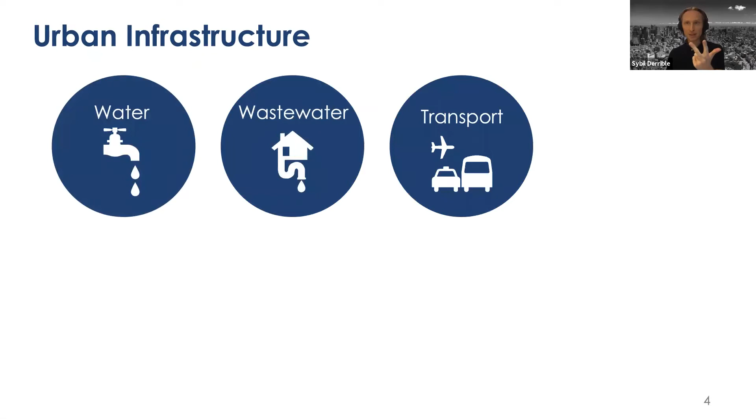To be a bit more precise, we're going to look at several infrastructure systems: water, wastewater, transport, electricity, gas, solid waste, and telecom. And then we'll talk a little bit about the future. We'll have quite a big agenda, going over 7 infrastructure systems. I'll try to be quick, but not that quick, and I'll try to at least show you things that are relevant to what you're doing. And we'll go in that order.

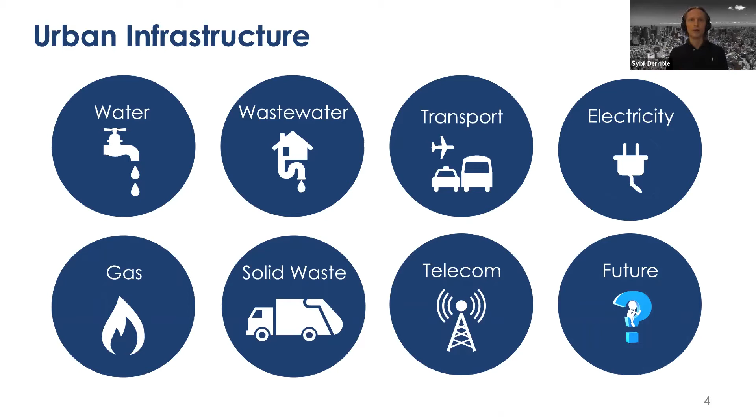So we'll start with water right now. When we're thinking about water, and when I say water, I don't mean wastewater, I don't mean storm water. I mean really just when you open your tap, how does water get there? There's 3 things that you'll have to do.

The first thing is we have to collect water from somewhere, then we have to treat it, and then we have to distribute it. I'm going to go over these three one by one.

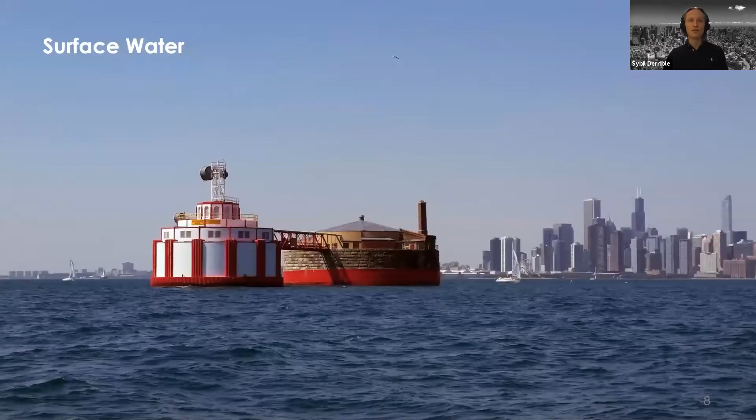Water collection: if you're lucky, like we are here in Chicago, you have tons of surface water right where we live. Here we're very lucky because we're on the shores of Lake Michigan. Sometimes you have access to a big river, or just tons and tons of water.

The way it's done in Chicago is actually pretty neat. You have cribs, like the one in the picture, about 2 miles out into the lake, a bit offshore to make sure we don't collect water near the shores that's polluted. Tunnels are dug beneath the lake bed, and a big tunnel goes from the crib all the way to the Jardine treatment plant near the pier. That's where the water comes from, is uplifted, and then we'll talk about treatment after.

So that's when you're lucky, when you have a lot of surface water. Otherwise, it's actually way more groundwater than surface water. Using pumps to pump water up from the ground and then treat it is also very common. About 30% of all the freshwater reserves in the world are in the ground, and close to 70% are in the ice caps. So many cities actually pump water from the ground. I'm not going to go over how that works—we have two types of aquifers—but that's just one of the sources of water.

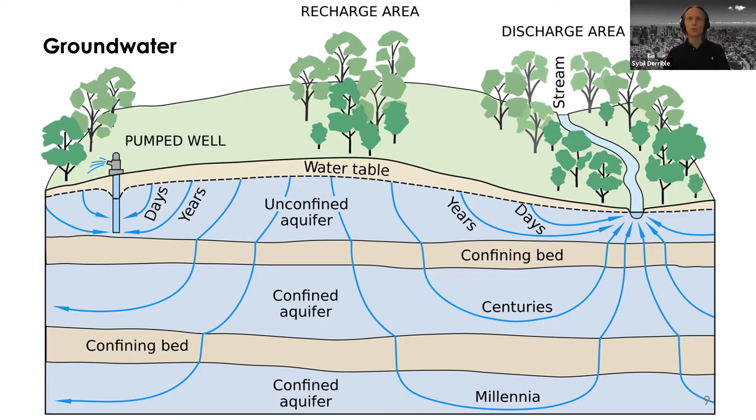And the last one, which is becoming more and more common, is the sea. Cities are getting bigger, but sources of water are not getting bigger, so sometimes we have to be creative. For the longest time it was very difficult to get water from the sea and purify it, but now we're becoming better and better at it.

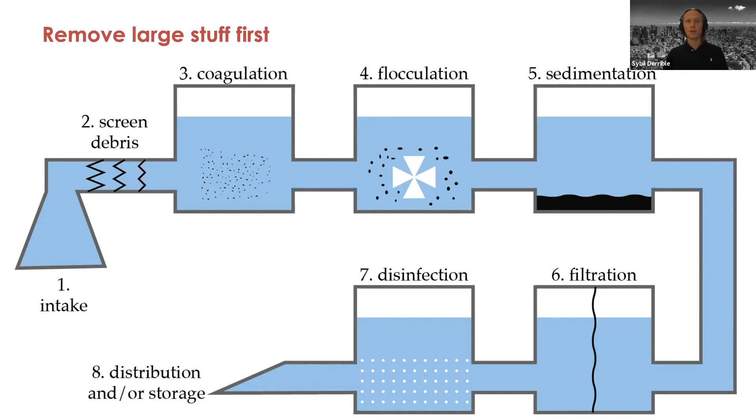After water is treated, it's time to distribute it, and that's where you have those pumps.

I'm going to show you a water tower because it's actually still working in Chicago. In some places, when they have a lot of hills, they have the water treatment plant up the hill, and this way gravity just pushes all the water through the system.

Where I'm from, in St. Pierre and Miquelon, that's what we have. We have a few lakes at a fairly high level. We get water to a water treatment plant, and all the houses are below the water treatment plant, so gravity just does its thing.

Chicago is flat as can be, right? You cannot get more flat than Chicago, so we need pumps. We have a few pumps, not that many - about 12 pumps in Chicago - and they keep pressure in the system, in the water pipes, at all times to make sure that when you open your tap, water is flowing out.

Every time I have visitors coming to Chicago, we all of course have to go to Michigan Avenue. And of course, I have to bring them there, and I open it and show them how great the pumps are, and nobody cares except for me.

Someone told me once that engineering was a lifestyle, not a profession. I believe that - I really get intrigued and interested in things that many people don't have any interest in. I still push them to look at the pumps because I think they're really cool. Just go and you'll see them - they're massive, it's incredible. And it's thanks to those pumps that you have water whenever you open your tap.

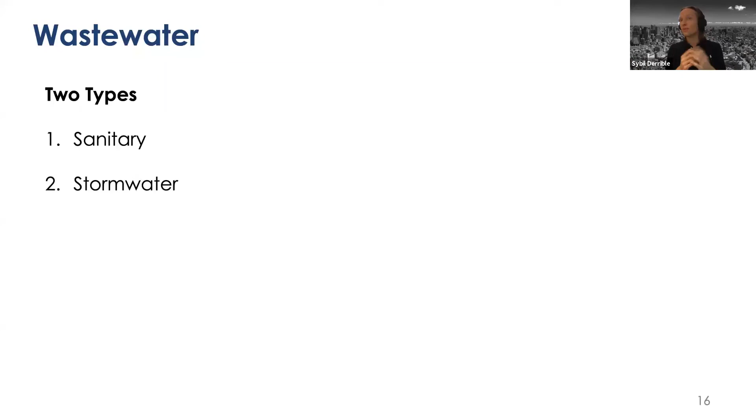And that's what most old cities did. When you have that, you have what's called a combined sewer system. It's combined because it's combined sanitary and combined stormwater system.

Here's a typical case in Chicago where you have a house, and people use water. Then it goes at the bottom of the house, because we use gravity, and then you have a pipe that goes to the sewers. At the same time here are the streets.

The streets, they're never flat. They look flat sometimes, but they're not. They're always arced a little bit so that water goes naturally to the gutters. And then from the gutters, they go to catch basins, and then from catch basins, they go to the sewers.

So you see that when it rains a lot, not only do we have all the sanitary sewer that comes all the time, we also have the storm water that comes there as well. And that's actually a big problem.

That leads to something called combined sewer overflow. We actually suffer from that very often in Chicago, where the sewer system is completely full. And so what happens is that a lot of that raw sewage is just being put in the Chicago River, completely raw, untreated, which is a very, very large problem.

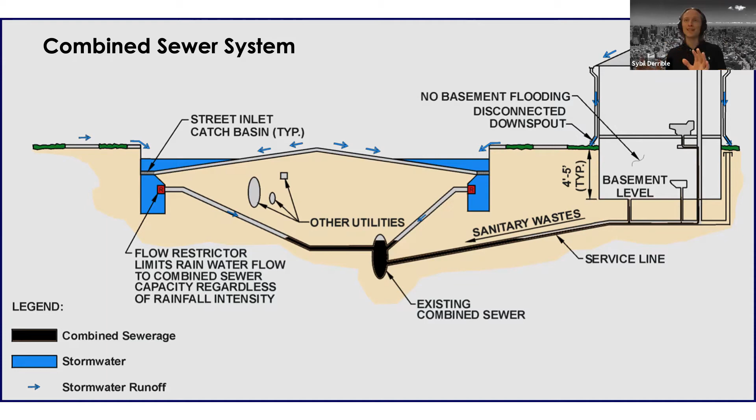Many cities have that problem, combined sewer system, it's not only Chicago. We'll talk about some solutions. But now all new cities know that it's a big mistake to have a combined sewer system, so they all go the separate sewer system route.

And that's what it looks like: you just have two different channels, one underground for all the sanitary sewer and one underground for all the stormwater sewer. The stormwater sewer, usually you can just dispose of that directly back into the environment, you don't need to treat it, as opposed to the sanitary sewer that always goes to a wastewater treatment plant. So now you have to think, you have to wonder, what do I do?

My sewer system is blocked. I have way too much water when it rains. What do I do? What do I do?

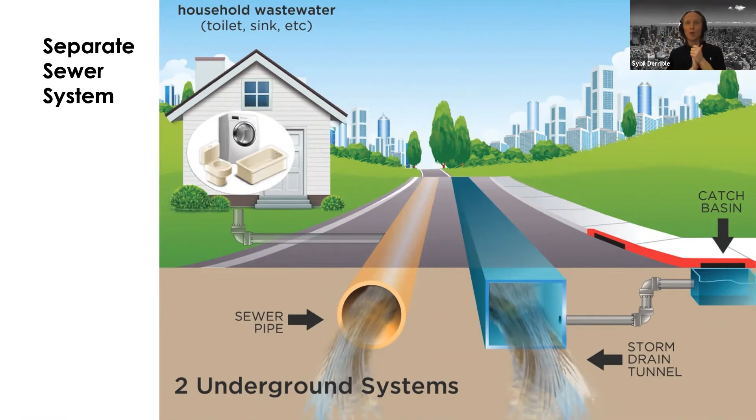So a lot of it is just disposed directly into the environment, in the Chicago River, which we don't want because that water is polluted and contaminated. So what they decided to do is build massive underground tunnels, bigger than subways, bigger than the blue line or the red line when you go downtown. And that's what we see here.

All the overflow, instead of going to the Chicago River, goes to a large shaft that's underground. Massive. All of these go in one direction. You have to store that extra sewage, and then it goes to old quarries, which are just massive bowls that are there, and all the water is just disposed there. It stays there for a while until the rain is over.

And when the rain is over, bit by bit, it's pumped back to wastewater treatment plants. It's treated, and then disposed back in the environment, like in the Chicago River, and then it goes to the Mississippi River, et cetera.

That's an overly engineered technique, typical of the 1960s and 1970s. Right now, we do things differently, or we try to do things differently, or we try to have multiple strategies.

The thing that people realized, maybe in the 1990s, especially the 2000s, is what was the real problem? Is the problem that we don't know what to do with that water, that we can't get rid of it quickly enough? No, the real problem is that those surfaces are impermeable. It's all concrete, it's all asphalt. Water falls, it has to go somewhere. It can't go through the concrete, it can't go through the asphalt, so it's just going to follow the land.

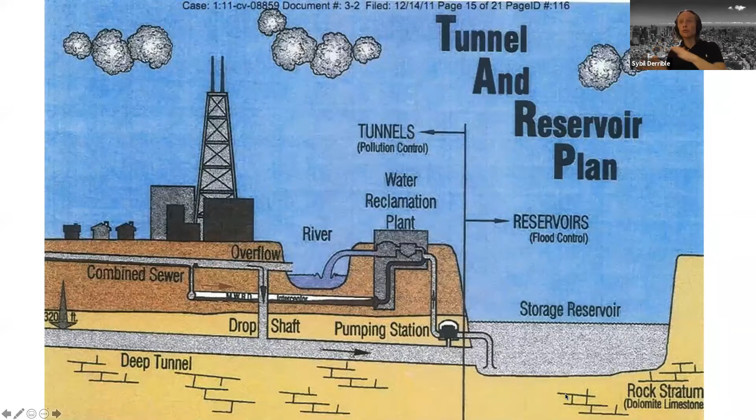So what the engineering profession has been doing, especially in the past 15 years, is to make surfaces that used to be impermeable more permeable. A great example right here in Chicago is Argyle Street.

So I don't know if you like Vietnamese food. I'm a big fan of Vietnamese food. Actually, 2 years ago, I spent 6 months in Vietnam. It was an amazing time.

That's green infrastructure, called green infrastructure or low impact development. So here, a lot of water just goes below, between in the cracks of the pavement, and it stays there. When that gets full, it goes in the planter, which keeps a lot of water as well. And when the planters are full, then it goes to the sewer system. That's the way you can keep that water on the surface as opposed to going to the sewer directly.

Similarly, when you go to a street curb, and you see after it rains that the street curb is completely flooded, people think that catch basin is full, something is not working, you have to call the city, maybe it's blocked. That's actually not true.

It's actually working pretty well, because what they've done is put a restrictor plate in the catch basin, a little hole so that not much water can go in. So what you're doing is artificially flooding the streets a little bit instead of that water going into the sewers. Because if it goes in the sewers, it might lead to overflow, or it's going to lead to sewer backups. Some of you might have experienced sewer backups in the past.

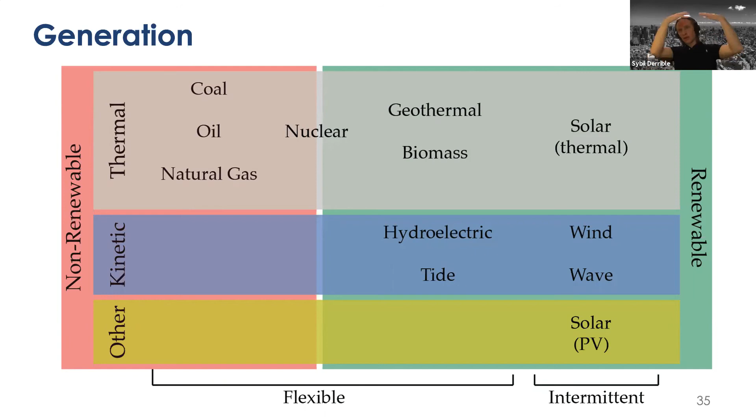Here are some examples: geothermal and biomass. Geothermal comes from volcanic or geothermal activity, like in Iceland. Biomass is by burning trash, crops, or trees. Solar thermal is one I like because people don't usually think about it. You all know about solar photovoltaics, those solar panels, but you can also just use water—either heating it with the sun to use instead of a water heater at home, or using mirrors pointed at water to create steam and generate electricity. So thermal is one way to create energy. Nuclear is right there in the middle, because nuclear is not renewable.

It's not renewable because we're still mining uranium and plutonium, and we're going to run out of it exactly like coal, oil, and natural gas. But at least there's no greenhouse gases, so that's one of the big benefits of nuclear.

Then we can have the traditional renewables: wind, tide, and waves. Wave and tide are becoming bigger and bigger. We actually just did a big thing about tide, so I think tide is going to be big in the future.

The golden child of electricity generation is hydroelectric. You dam up a river, flood what's behind it, and use that force to generate electricity. 4 out of the 5 biggest power plants in the world are hydroelectric. The biggest is the Three Gorges Dam in China, which I dream to visit at some point.

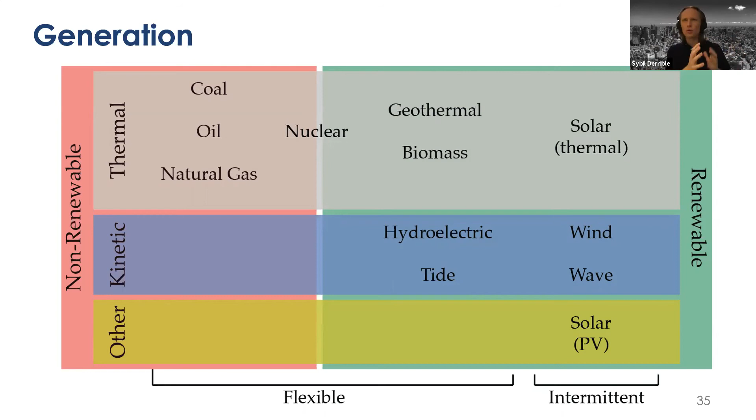And then we also have solar photovoltaic. But you know about generation - I'm sure most of you know something about generation. So what I want to talk about is more the distribution.

Once we've generated the electricity, we distribute it first through big power lines - these are the transmission lines. Then they go to the substation, and from the substation through distribution lines, which is what you see in your back alleys. Then from that it goes to your home. So you have transmission lines, distribution lines, then to your place - or transmission, substation, distribution, then to your place.

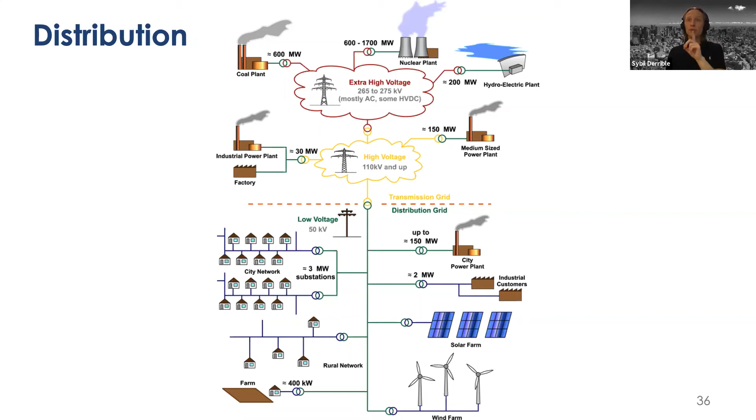But as far as I know, everywhere humanity has decided, in the past maybe 150 or 120 years, to generate 3 currents. Every single motor that generates electricity creates 3 currents, and those 3 currents are distributed in the grid. We could do 4, 5, or 6, but we've decided on 3. 3 is nice because they can balance each other a little bit. That's why when you look at every power line, you're always going to see 3.

I've been in rural parts of Vietnam, in Japan, in Europe, and everywhere I go I always see those 3 cables. I could be wrong, but it's one of the most universally accepted things that we've done as human beings.

We don't have a common currency, we don't have the same voltage, we don't have the same pressure - there's a lot of things. We don't even have the same system; somehow Americans don't like the metric system. I don't understand it - the U.S., the biggest, most innovative nation in the world, can't even use the metric system. It's like people still talking about the Sears Tower. At the beginning I was like, alright, so it's not the Willis Tower, it's the Sears Tower. But then I was like, no, why, how is such an innovative country so set in your old ways? It's just called the Willis Tower. We're innovating - so at some point the U.S. sort of has to move to the metric system.

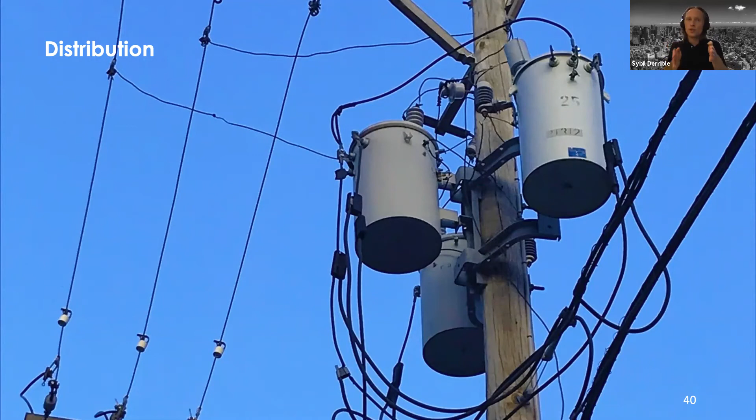So they're exactly opposite. What we do then is, if you go to your electric panel, you should see that you have always 2 sides here in the US to your electric panel, because out of the 3 phases, you actually get 2 phases at home. That's the way it works. The nice thing about having 2 phases - that's really the US - in Europe they have 240 volts but only 1 phase coming. In the US it's 2 phases.

And the nice thing is that when you actually require a lot of power, you don't want your current to be too high. So instead of asking for 120 volts, if you put 1 phase to neutral, you get 120 volts. If you put 1 phase to the other phase, then you get 240 volts.

And I think that's about it. So I would really encourage you, right after this talk, to go to your electric panel, open it up. You'll see the 2 phases. Don't mess with it, but just look at where you have double breakers. You'll see that the biggest appliances that require electricity are going to have double breakers, like your AC, some of you maybe the stove, some of you maybe a washer, dryer, or the HVAC system if you have one.

But I know here in the US, in Illinois, most of us have gas systems, so you're probably not going to have too many double breakers. But those appliances work with 240 volts, and you can't do that unless you have those 2 phases. So don't mess with it - call an electrician if you want to do anything. But it's really cool. I remember being super happy when I opened my electric panel and seeing that.

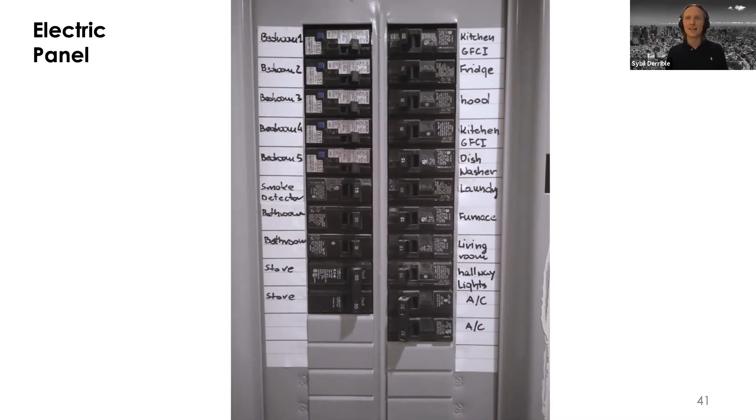All right, gas. I'm going to go very quickly over gas because we just get it from the ground, process it, and distribute it. The one thing I want to say is, for all of you who are environmentally friendly, right now in Illinois it's preferable to use gas than electricity because the way electricity is produced actually requires a lot of fossil fuels. I know we had a lot of nuclear, but we also have a lot of gas or coal - the electric grid is not that clean in Illinois.

So here it's better to have gas. But at some point, once the grid becomes cleaner, once the energy emissions related to the grid are lower - and this is the case, for example, in Massachusetts, I think, and in Vermont, where they get a lot of power from Canada and it's all hydro, and in Washington State where there's also a lot of hydro - there, what you want is to power your home, your heat, etc., with electricity. Here, it's better to have gas.

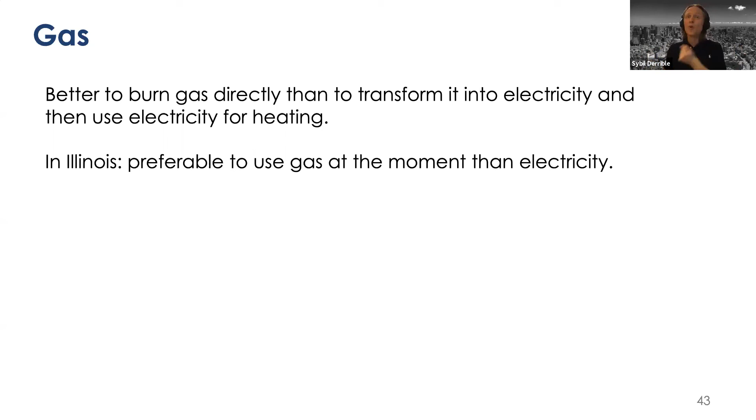The other thing I want to say is that gas - something I learned recently - is that we import a lot of gas from places. And then what we do is we store it in the summer when we don't need it. And where do we store that gas? We actually store it in the ground.

So we try to find some places in the ground, like aquifers or old gas wells, that have that nice rock, and we just store the gas there in the summer, then pump it back up in the winter. That has some problems because of leaks. I don't want to talk too much about gas, but it's still a pretty cool infrastructure to learn about.

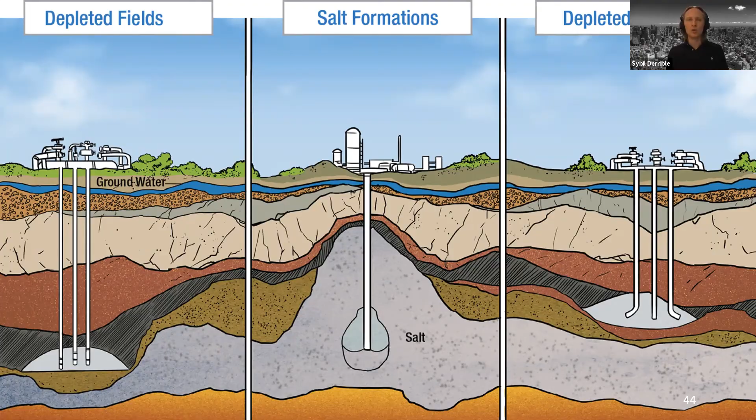When we talk about solid waste, I'm going to go very quickly. You know those big trucks. I remember another thing.

But the one thing I want to mention about solid waste is that it starts with you. It starts with you picking up an item, whatever it is. You pick something and think, this now has no value for me, and it's solid waste. That's where it starts. So when you're looking at integrated solid waste management, we're really trying to think about everything, including from the very beginning. But usually the way it goes is you take something and say this has no value to me now, I'm going to throw it away.

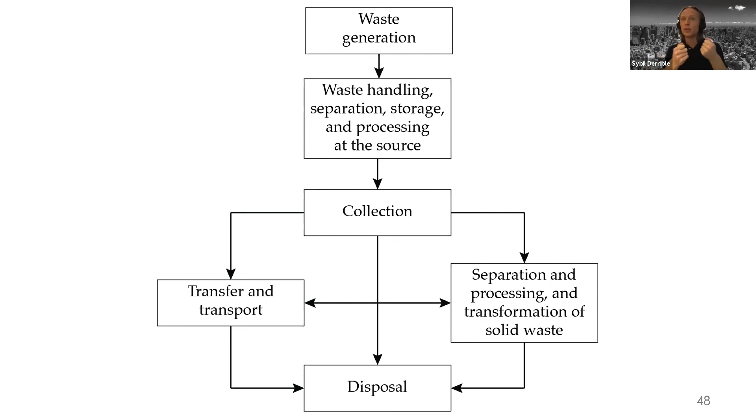That's one. Next, you're going to put it somewhere. So if you have recyclables, non-recyclables, and compostables, you might throw them away in separate bins. Then it's collected, transported, maybe processed, and then disposed of in the end.

There's usually a hierarchy we follow. The first thing is try not to create waste if you can. If you do, try to reuse it. You can reduce or reuse it, and if not, try to recycle it. If it can't be recycled, throw it away, but try to recover some energy from it. In the end, the goal is to treat it.

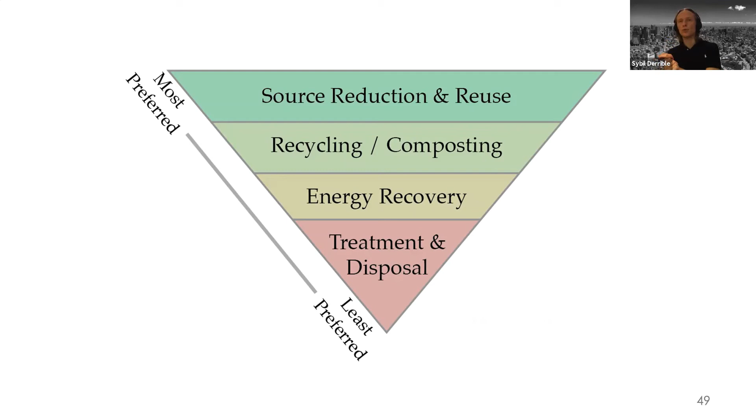I know it's 12:46, I'm going to go very quickly, but there's tons of things you can do. Of course you know about traditional recycling: paper, glass, metal, plastic, and then landfill. These are nice posters from the UIC Office of Sustainability.

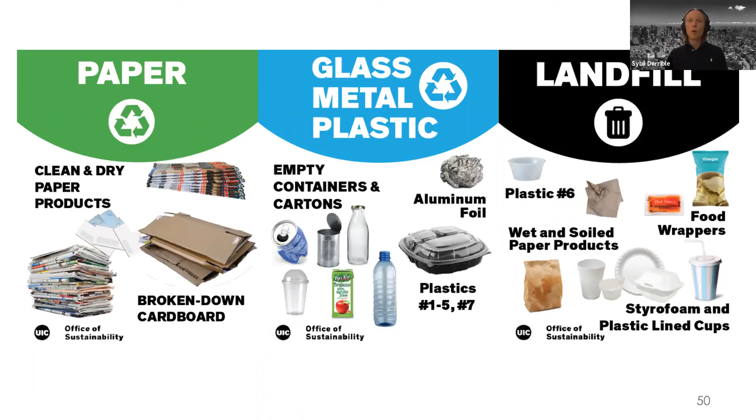Composting is actually a type of recycling because you're transforming waste into something else. The real name is aerobic composting, because you're using air to transform that waste into fertilized soil. But you can also take all that and put it in containers without air, which is called anaerobic digestion. You still have the same process happening, but instead of just having that nice soil, you're also producing methane. That's natural gas, and we can burn it to create heat or electricity.

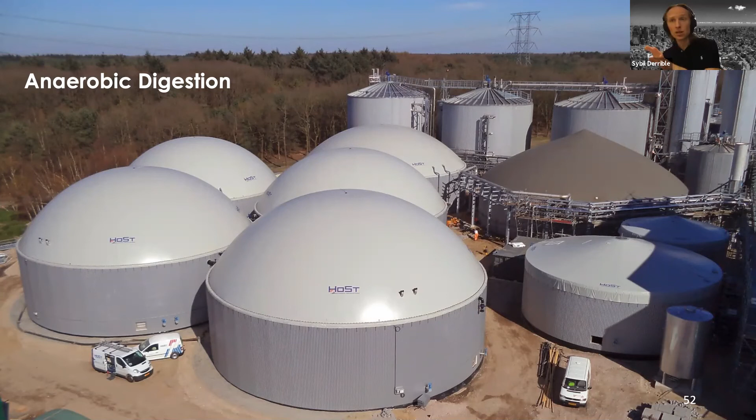Even Ellis Island in New York City — most of Ellis Island is actually rubble that came from excavating New York City for the subway system. All those rubbles had to go somewhere, so you just throw them in the ocean and create new land. That's what Ellis Island is like.

Sometimes we also like to burn it. We have some of that in the US, not that much. Japan is a pro at burning waste — you get the waste and burn it, essentially everything that can be burned, you burn. Concrete and everything else you separate and try to use for something else, but everything that can be burned, you burn.

When you burn waste, you produce some heat and or electricity, and then what you're left with is ash. In that ash, you might have some metals left, so you try to extract them. Otherwise, you can throw the ash away. What they've actually done in Singapore and Japan is build new islands with the ashes that are left. So that's waste-to-energy recovery.

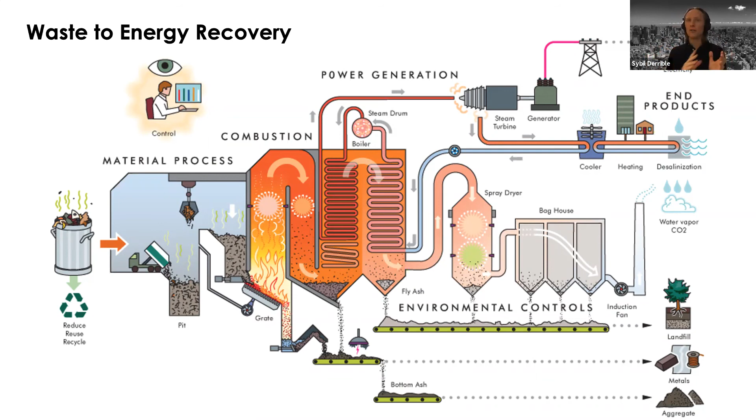In the US, what we like a lot is to put everything in a landfill. A landfill is really just a big dump to put everything. We try to do it nicely by having a big tarp at the bottom, because when everything gets there it's kind of like composting, it's macerating, decomposing. You have some liquid called leachate flowing to the bottom. If you don't put a tarp, it actually goes into the ground and you might contaminate groundwater. So we have a nice tarp so the leachate is contained.

We have all the waste there, and then we cover it, and exactly like composting or anaerobic digestion, it's all being decomposed, which also produces natural gas. So then we recuperate that natural gas and can use it. Here we see a leachate plant to gather that leachate, and we also get that natural gas. So it does require quite a lot, but remember that hierarchy.

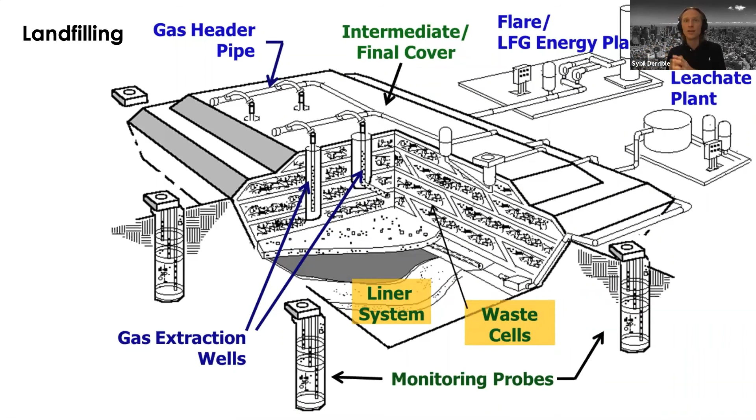First we try to reduce. If we can't reduce, then we try to reuse. If we can't reuse, then we try to recycle. If not, we recover, and then we'll just let it rot.

In terms of telecommunications, I'm going to go over it very quickly, just a couple of slides, but it's a fascinating world. I just learned about it recently, learning a lot about analog and digital telecommunications. It's incredible how we can talk, and I can stream this now in real time. It's just about incredible.

The way it works, and the way the internet works, is really cool. I know I don't have time now, it's 12:50, but at some point maybe I can tell you about it.

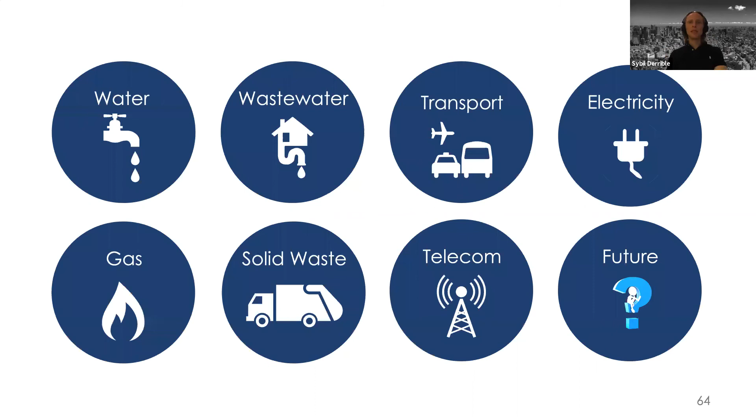In terms of the main trends, what I see in the literature and when I talk to people, for water the big one is conservation, trying to conserve more water, especially in the US. We do consume a lot of water. It might not come as a surprise that the US is the highest consumer of water in the world. So conservation is probably the way to go.

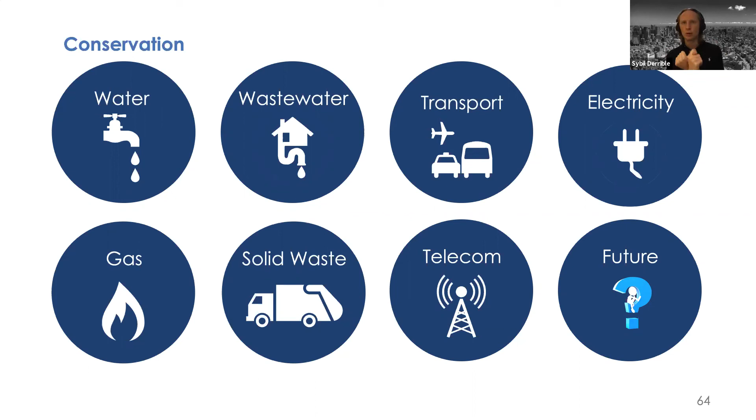In terms of wastewater, it's green infrastructure and low impact development. That's transforming cities. I love the fact that cities are getting transformed everywhere in the world to deal with wastewater. Solid waste is probably the grossest type of infrastructure we can think of, but it's transforming cities, and it's incredible.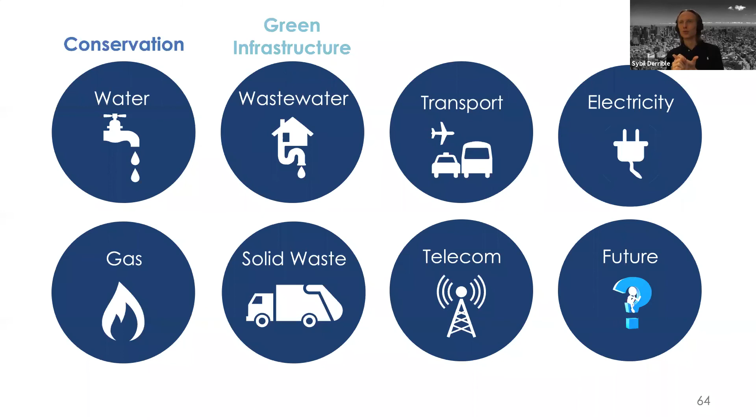In terms of transport, it's accessibility. I didn't talk about accessibility before, but right now we're thinking about it. That means that not too far from where you live, you should have access to a lot of things - grocery stores, jobs. You should have access, hopefully, to transit, as well as a car if you want, a bicycle, and to walk. So accessibility is very, very big.

That's both favoring transit and active transportation, as well as land use - really rethinking land use.

That's also going to ring a bell maybe to some of you when we think about food deserts. Food deserts are especially low-income areas with no grocery stores there. So people sometimes have to drive or take the bus for long hours, or drive very far away, just to be able to buy food.

And that's a very, very big problem. So accessibility in transport is the biggest thing that's coming. We can talk about other things like mobility as a service, but I won't.

In terms of electricity, it's all about renewable energy. If any of you are pro fossil fuels, what I like to say is look at the biggest fossil fuel companies in the world - Shell, BP, Total, except for Exxon in the US, I don't know why - but all the others are transforming from fossil fuel companies to energy companies. They're all installing power plants like wind turbines, wind farms, solar farms.

They're all doing it because they have the data and they know we're running out of fossil fuels. If the experts are running away from that, I think it's a pretty good indication that we should run away from it too. Renewable energy is really the way to go.

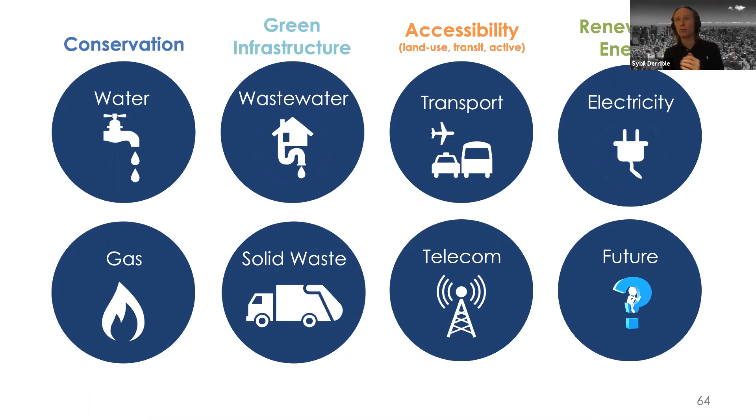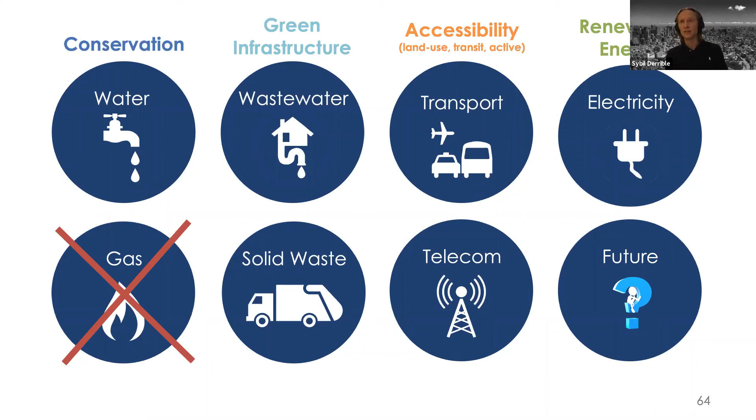Gas is a fossil fuel. It's just going to disappear at some point - probably not in the next few years, but it will disappear. It's a fossil fuel by definition, and we can't sustain using it because it will disappear. It's not even an emissions thing - there's a finite quantity of gas. The more you take, the less you have left. So at some point you'll have to phase it out, and gas is just going to disappear.

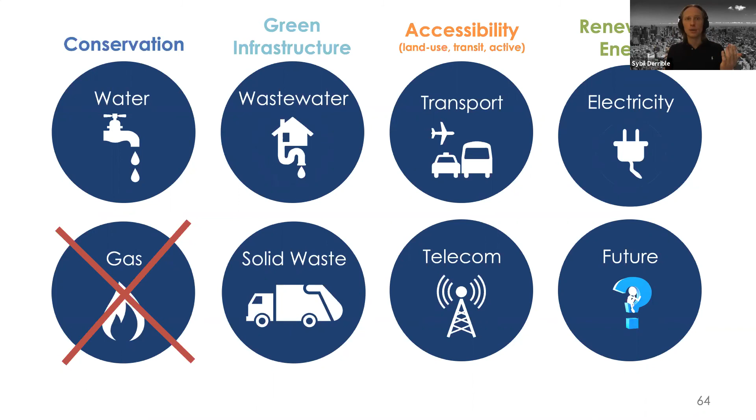Solid waste is all about reduction and recycling. The US recycling rate is about 35%, which is okay - better than some countries, not that great. In Germany, it's all the way up at 60%. And telecom, I actually don't know much about telecom right now.

Is it going to be more or less? I think we're probably going to have way more telecom, but it's also less because we see the problems with social media and how it's affecting especially our mental health. So we might have less telecom in the future.

The one thing I know is that telecom requires a lot of energy. It requires a lot of electricity. And so telecom should be powered by renewables.

About the future, I can tell you one thing when it comes to infrastructure is that in the future, it should be a lot more multifunctional. The way that we're building infrastructure now, most of it tends to have one single function. We're building a road a lot of times to carry traffic. We're building water treatment plants just to treat water. But there's a lot of things we can do where infrastructure becomes multifunctional.

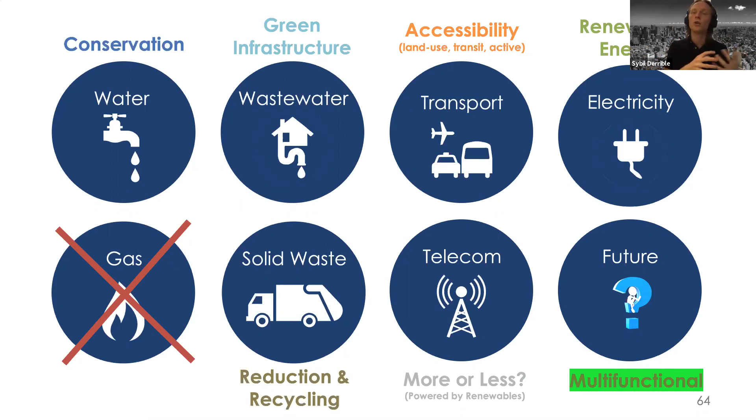Roads is a great example because roads have to deal with stormwater as well as traffic, and in the ground you also have electric lines, sometimes water pipes, et cetera. So making infrastructure multifunctional is really where the world is going right now.

All right, that's all I have for you. I know I was very, very fast. I hope it was good. You're going to get access to the slides, so don't worry.

Of course, you're more than welcome to email me just about any time. It's very easy, Derrible, like terrible with a D. I always say I'm Dr. Derrible, I'm the bad guy in a James Bond movie, I'm the villain, Dr. Derrible. That's why I go by Sybil. So please, everyone just call me Sybil. And I'll be here to answer any questions that you may have.